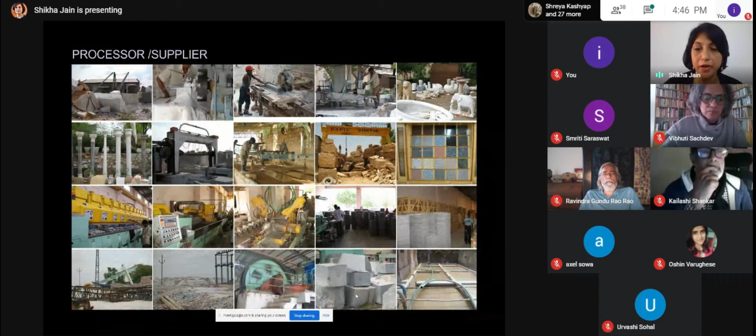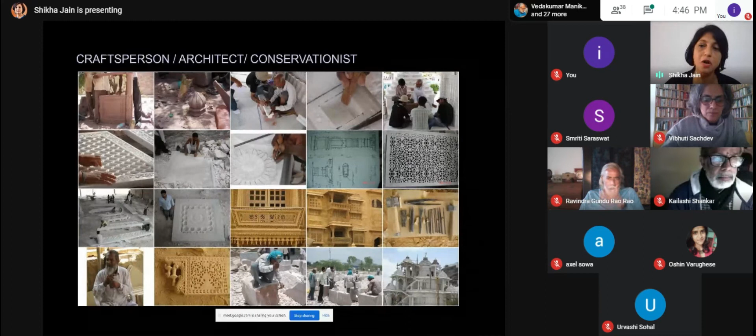I won't get into details of this, because my focus is really the craftsperson, who really gave us all the knowledge. We could record the various architectural elements, structural elements, and how they were produced since long, and how we can still continue some of these.

In the guide itself, we have looked at mapping each cluster, what kind of stone is there, the geological qualities of the stone itself, what kind of products are produced, what kind of finishes are used, and what kind of tools are used in each region.

So we had this kind of guide, also looking at the history of stone in each area. Though Rajasthan is supposedly one state, because of the diverse clusters and stone types, it's a different historical and even stylistic perspective that you see everywhere.

The types of stones, including the processing, the products, and the issues faced in each case, the techniques that are used. And this is a glimpse of the products from the Jaisalmer area.

So the question really was how can we learn about stone crafts and the knowledge systems. And of course, we have two references today. One is we understand the details from historic architecture, which is plenty in case of Rajasthan in stone, and also learn from the master craftsperson, fortunately, of which we still have a few in Rajasthan.

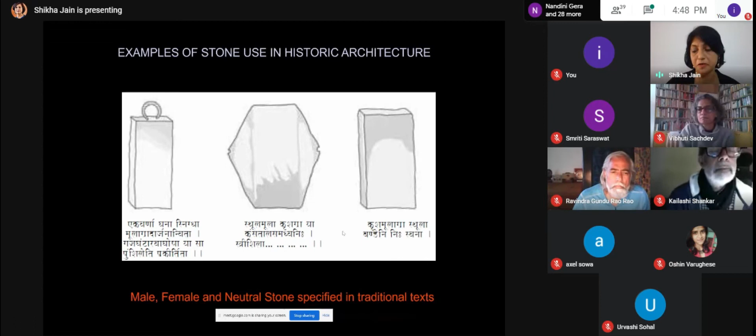So the guide also records what Vibhuti mentioned about the Shastric perspective, the three kinds of stones that are used, and historically what the structures were like, such as temples where these stones were used. There are texts like Rajwallabh Mandan in case of Rajasthan and Mewar region, used primarily in Rajasthan and Gujarat, a 15th century text where such aspects are mentioned.

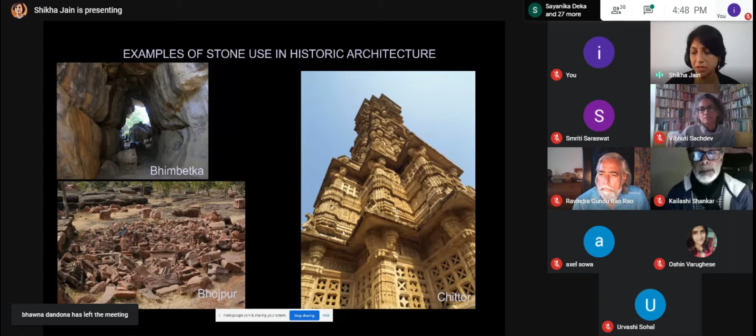There is even mention in the Agama Shastras of what kind of stone is used for which kind of deity, which Mr. Kailash has already elaborated on a lot.

But moving further into history, towards the Mughal period, we again find how stone buildings were constructed. Most of the Mughal architecture was largely built by Rajasthan craftspeople who were trained at that time. You can see this from Akbarnama and Baburnama, the construction of a garden or the construction of the Agra Fort, which is in red sandstone.

And later on, of course, we have evidence with the British, Lutyens' Delhi, entirely made from stone from Rajasthan, as well as craftspeople from there.

And of course, post-independence India, where we continue to use stone, like in the Birla temples that we see today, or even 20th century temples like this Vipassana Pagoda in Mumbai. There are more Birla temples across everywhere, so it's good to see continued use of stone.

I would agree with Vibhuti that it is also thriving. I feel stone is thriving, and which is really good. And the craftspeople need to thrive too. So moving on to really the builders in stone, which are our craftspeople.

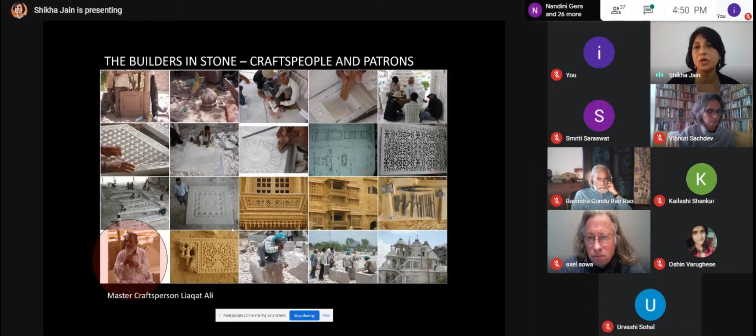This Mr. Liaqat Ali is one of the master craftspersons in Jaisalmer. I'm not sure whether he's there anymore, but when we were working on this, we had long interviews with him, and we could really understand the thought process and the kind of

the kind of intelligence that a craftsperson has, and the intensive knowledge that we need to now disseminate to the younger craftspeople who are just joining and copying most of the time. So who are the stone craftspeople today? Like what Ravi said, he was talking about the newly trained communities who sometimes don't know much. But then you also have the master craftsperson from several generations. Out of the 100 plus that we interviewed, we found that there are at least 6 or 7 who

can really be considered as master craftspeople, and who can actually train the younger ones in the right manner. If we look at the kind of segregation, the Stapati or Sutradhar - Mr. Kailash has already elaborated, he's really the master builder for temples, still has the knowledge. In case of South, it is the Stapati. In case of North, you have the Sompura community from Gujarat, who still continue till today. And they have the inner knowledge, but today they also have proficiency in AutoCAD and preparing estimates. So we had a lot of interviews and also had workshops organized with some of the Sompuras.

The sculptor or the Shilpkar, very knowledgeable. He's the one who himself goes to the quarry and picks the stone for a particular deity, because whether it's male, female, or a particular kind which is required for that particular god that he's going to carve, is the knowledge that the Shilpkar has. And that's how they select the particular murti, the stone that they want to make.

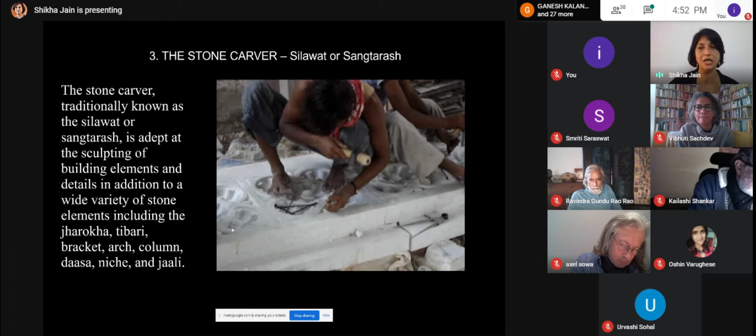The stone carver or the Silawat or Sangtarash, largely that came up during the Mughal period. These are the carvers who are doing intricate carving, whether it's jali or in the beam, the pattern that has to be given. That's what you see in this particular picture in marble carving.

The inlayer or the jadati, which is again the inlay work, stone inlay work that came from the Agra monuments created by the Mughals. But then some of these communities also moved on to places like Udaipur, where you still find Titri and Sukher as 2 stone clusters within the city of Udaipur, where you can see this stone inlay work that continues and is currently being used in a lot of heritage hotels and elsewhere.

And of course the basic stone mistri, who would be making your stone wall, who is still in plenty in case of Rajasthan. And then of course the polisher or the quarry workers who would just be doing the finishing at times or basic carrying of stone who are there. So this is the gamut of workers in stone which currently exist even today in the stone industry in Rajasthan.

And moving on to the manual that we mapped, we are looking at structural elements. So we documented each element in detail. I'm going to quickly go over these when I will just stop at the one on Jali, which we will show you in detail. And here we were looking at each element.

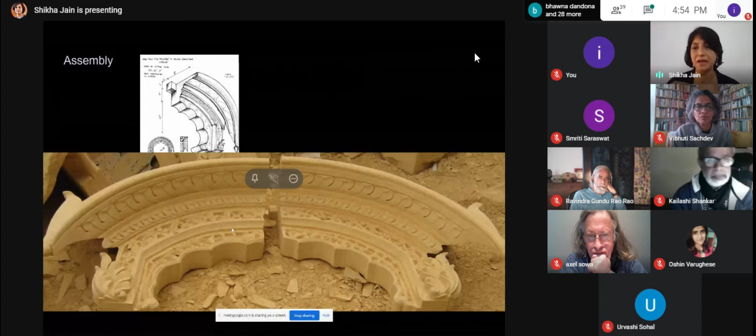Arch - what are the types as per construction method: cut stone, bracketed, corbelled, and then the types according to the form. Also the assembly, how it is assembled, the jointing in the form. And again, the jointing in the form also has that nar, mada - male, female, the dovetail joint, that is the tongue and groove joint that is there. So those are the codified languages of the craftspeople that we learned while documenting this.

And of course the finished products that are there in each case. Similar documentation for the beams. And this is much more elaborate in the manual. If you access that, you will find all. Some very important aspects like the bracket itself.

How do you make a single bracket, a double, 4 times, a corner bracket, and the most complex one, which is 5 or on all sides. So on the right side you can see the fixing of a bracket, which has 5 extensions to it and how it is fixed.

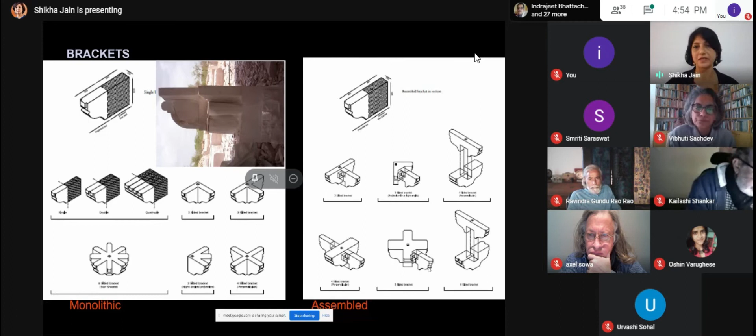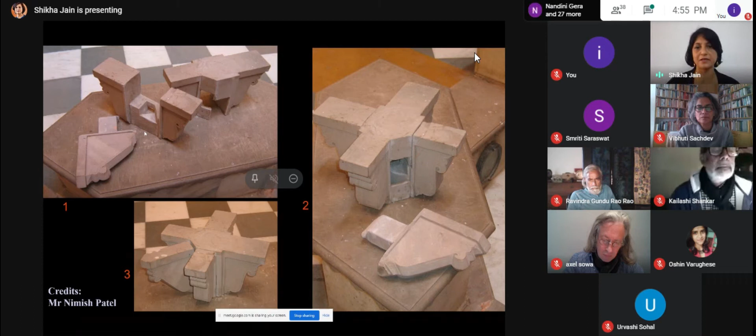And this is an example. This was actually created by Mr. Nimish Patel for the Haveli in Amer in Jaipur, where you can see a demonstration on how the bracket pieces are carved out. And these are 3 pieces that are then fitted in joints. And it just works very well as a 5-point bracket. And then according to construction, you have these corbelled brackets also. And we looked at the fixing details.

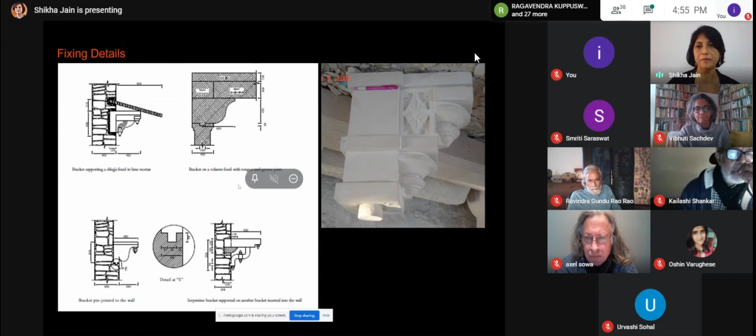How much does a bracket have to go inside to create the support that is required? In some cases, it's almost half the bracket. So you take the entire piece and you just carve on half of it, whereas the rest of the half goes inside the thick stone walls that you see in historic structures.

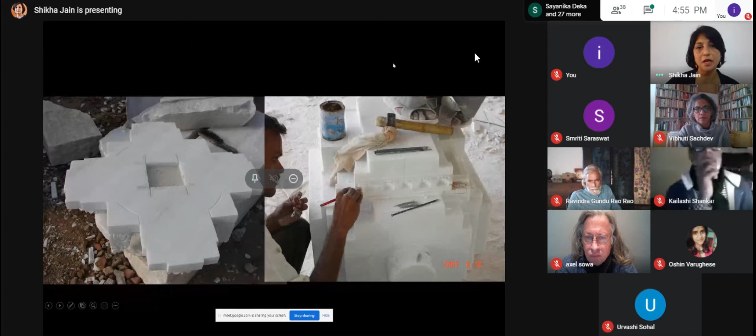These are examples of some columns. Again, the monolithic columns, how the assembled ones with jointing, or the simple masonry ones that you have. And the kind of jointing, again, that you see in these columns, or the variety that is there.

And a roof, which is very complex. Of course, you have the plain roof, which is flat roof, called the tukri roof in case of Rajasthan. And then you have the stepped roof, which is the sort of dome created by corbelling, and you find it in a lot of historic structures in Rajasthan.

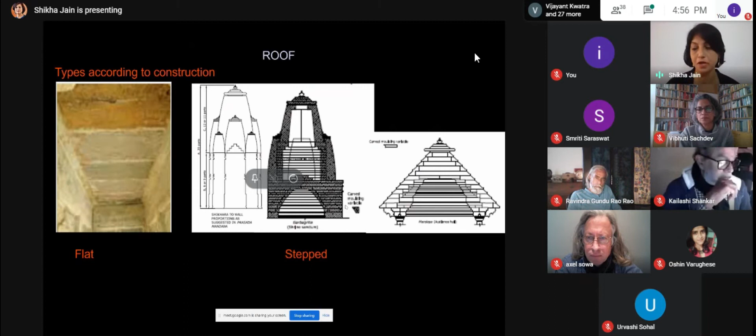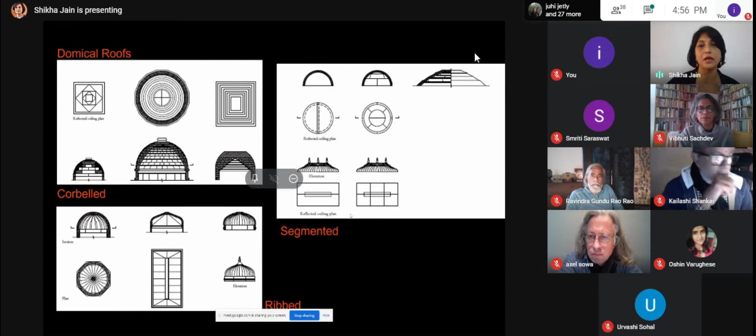I will show you one conservation that we have done in this. The domical roofs, corbelled roof, segmented roof, and these are, of course, the drawings that we created while looking at the sites and talking to the craftspeople. But this image would give you a clear idea.

So you can see this is the corbelled roof, so it's a chhatri domical roof, but corbelled here. This is a ribbed one where you see ribs joining each other to form the dome. And this is a segmented one where you see two segments coming up to make one chhatri. So there are so many variations.

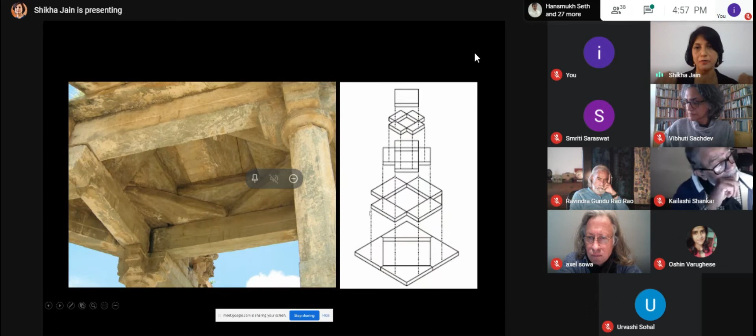And this is another chhatri where you see some kind of corbelling, but there is a system that is going in the laying of stones as they go up. And another example, which is a contemporary one, but from one of the workshops of the craftspeople that we visited.

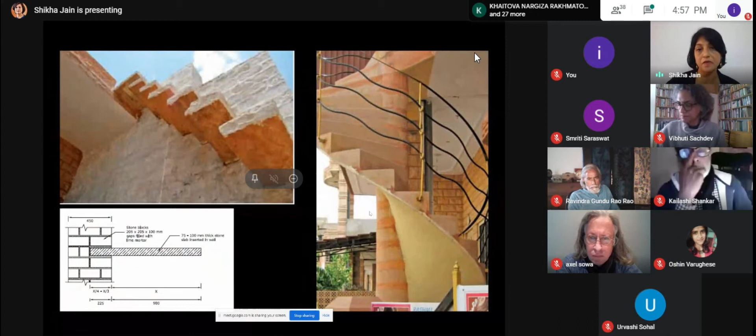Similar variations in stone staircases, which are projected, and very interesting ones that you see, which could just be treads fixed like this. Or in the historic structures, of course, we find a great variation.

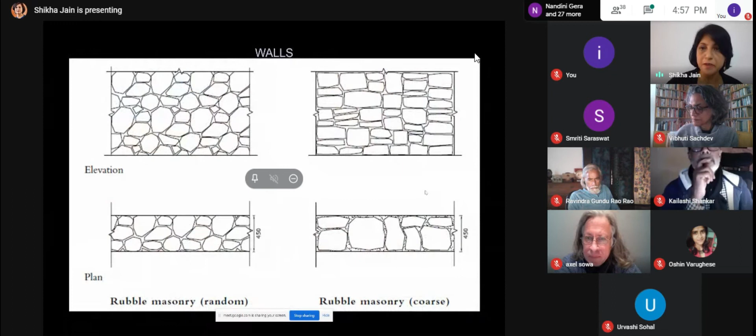The kind of walls we mapped, I will not get into details of this, but the rubble masonry, ashlar, and also locally what they were called, like the Talpai wall in Jodhpur, which is very typical on how they use the stone.

And these are some examples. So here you can see one of the walls, which is sort of a talpai finish that comes at like a cladding here.

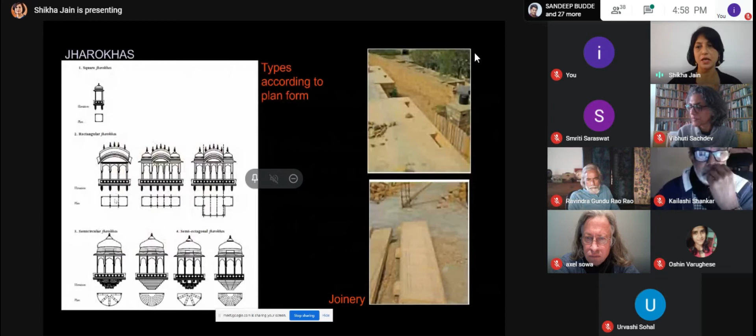And then going on to architectural elements, we looked at the various kind of jharokhas, again, how this fixing of this particular detail is done, the variations that exist in jali. I will get into the details later, but it just shows the variations that are possible, even in smaller details.

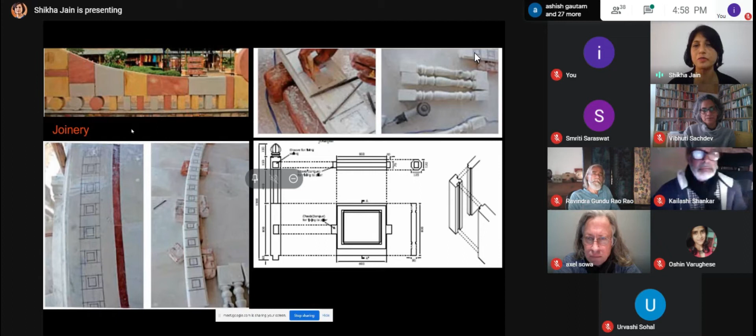Like plinth or coping, the kind of designs or carvings that you see, the railing patterns that are there, whether it's monolithic, assembled, or carved, latticed, various kinds that you see, both contemporary and traditional, because our whole scope was moving from the historic to the current practices.

And these are some of the contemporary examples of railing, including jali work also. And what you see right below on the right side is from the Gandhi Museum in 30 January Marg in New Delhi, where you just see these sandstone structures very interestingly tied up with the stone elements that are vertical, and then just the horizontal rods there.

The water spouts, so much variation in each detail. It's really saluting the craftspersonship that Rajasthan and India has.

And then, of course, coming to the current practices, the use of stone, which is largely in finishes. And the main concern here was that Rajasthan has a lot of stones, but now most of it is not being used for the crafts that should be encouraged, and which is a very high-end product that is created, but it is being sort of overused or misused in finishes like floor or wall cladding, whereas it has potential for much more. So maybe use less of the stone, because there are environmental concerns with the quarries and stone making.

I won't get into that. Even the craftspeople, how they suffer with diseases because of the way they work. But the whole point was to reduce the bulk use of stone, or only use it from the quarries where it is not appropriate for carving. And that kind of judicious selection is what is needed for our quarries, which are finishing now.

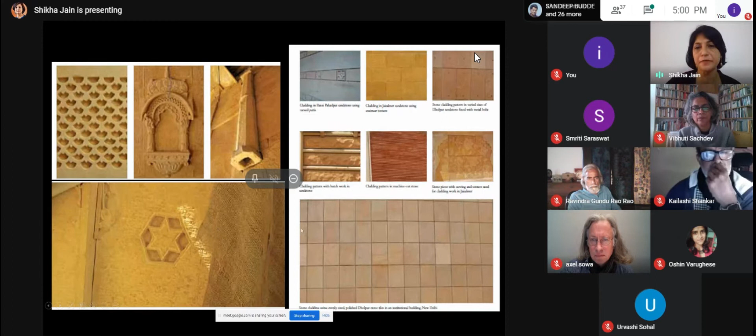So this is again showing various kind of finishes, surface finishes, which could also be hand and it could also be machine now. Again, the finishes on the cladding itself, you find a wide variation there in sandstones of various colors.

I will just explain the Jali in a bit of detail and then move on to the practical applications of how we are using this knowledge today. So for each element we've looked at, what is the origin and historic evolution? What is the process and product?

This goes for all the elements I just showed, from arch to all the other details, and I'm just showing it for the stone Jali itself. We find the earliest historical evidence as a square Jali, a basic square grid pattern in Rajasthan, which you will find in the Chittor and Kumbhalgarh monuments shown here, sometimes a basic square of 9 by 9.

9 by 9 was supposedly also a very auspicious square number that was used. And of course, with historical development and Mughal influence, it evolved, and then later again with the British time it changed. The referred texts on Jali I've listed are the Rajvallabh, the Jal Kaumudi by Pandit Kundan Lal in Hindi. I think Vibhuti would be aware of that, and she's written a paper on Jali which we were also referencing during the making of this manual and publications.

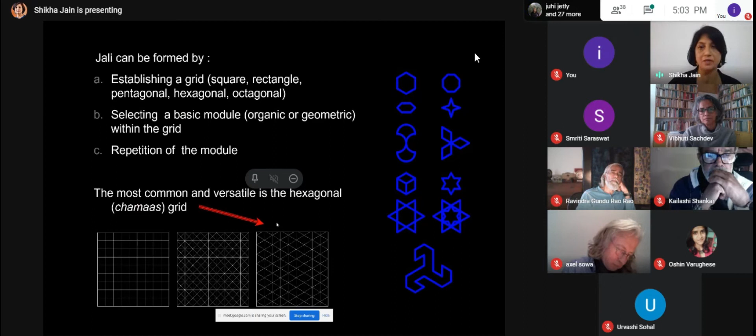The basic principle is that you take the area where you want to make a jali. If it's a rectangular piece, mark the center, and then divide both sides according to the intricacy required, so you make that grid. You draw the arc using the grid depending on what kind of pattern is required, and then you complete this.

Once you have this pattern, a master craftsperson looking at this square jali could evolve 10, 15, 20 patterns, or maybe more. But if it's not a master craftsperson, just a regularly trained person, he would not know anything beyond 1 or 2 patterns, and he may just trace that pattern rather than generating it. So this is what we learned, how these master craftspeople were actually evolving patterns just by using a grid, and those patterns were just in their mind, with a methodology to do it.

This is just the simple jali, but of course you see variations from different sources, Dholpur, Pindwara, Jaisalmer, and in white Makrana marble. So the same pattern you can see on different scale, and variations even in shape, as you see on the right side.

This is the master craftsperson Abdul Manan in Makrana, showing us how to make this particular jali. I don't have this on video mode, but there are YouTube links to DRONAH, our organization who worked on this, where you could look at the whole video clipping about how the jali is first marked using a green leaf on the white marble, then marking the borders, then using the compass to make the pattern, the divider to make the grid, and then marking the curves, and finally carving out this particular jali.

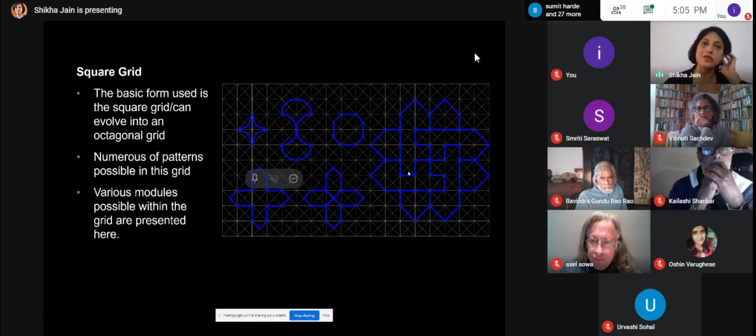Your final chiseling has to be done by hand, and that is what is important for hand carving in stone. This is just showing what kind of square grids, how many variations can evolve.

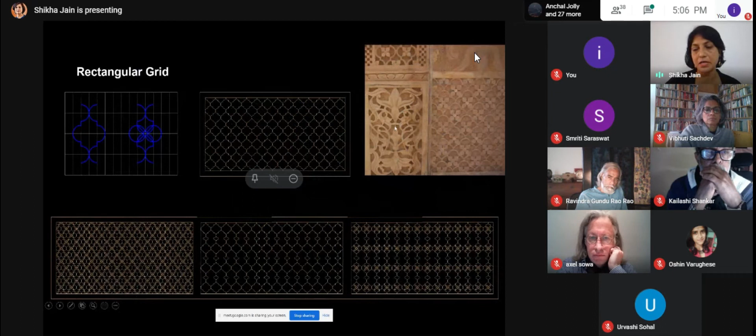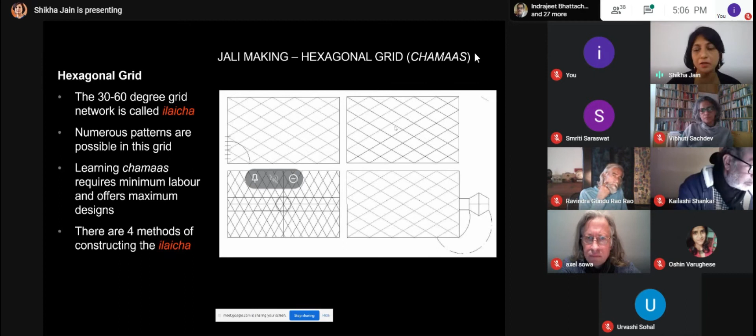The rectangular grid, you can see what it can give you on the right side. The hexagonal grid, which I mentioned, the Chamaas or the Ilaicha, is the network that they make to create it. Learning Chamaas requires minimum labor and offers maximum number of designs. So this was used the most, generated during the Mughal period, and you find most of the patterns being in this kind of grid.

But like I said, if it is a younger person, rather than making the Ilaicha in the proper methodology, there are four methods actually for making it. They may just make the grid and put a template on it, which would actually be just like copying and pasting. And if you need it at a different scale, you would make another template, and that's really not the right way. One really needs to work and mark on it, like the master craftsperson who taught us how to do it.

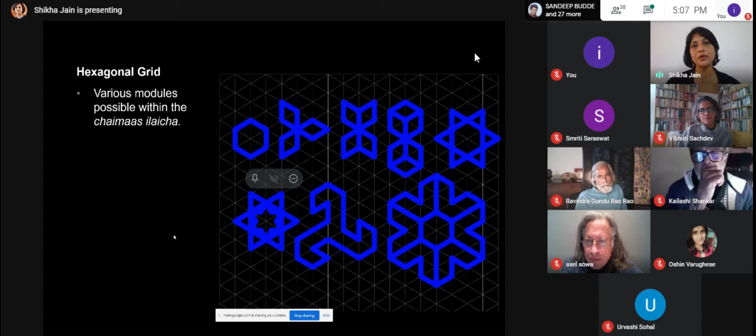This is a problem I faced when I talked to Liaquat Ali in Jaisalmer. He was just shocked. He said, I've got these young architects, or recently passed out architects, who come and give him an AutoCAD drawing with a pattern of jali and say, make it. He said, you look at the drawing and they have no knowledge of whether this can be made in stone or not. They are just offsetting on AutoCAD, creating a pattern that looks good on your screen, and you think it can be converted into a jali. So that is the gap we need to fill today, and really learn from such master craftspeople.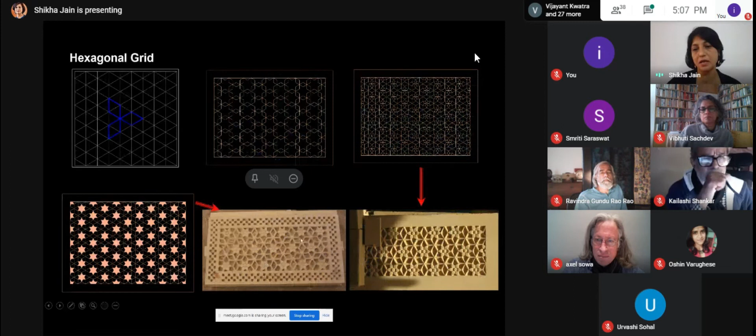So the hexagonal grid, again, look at the variety of patterns. It can be just jali, or it can be filled like a relief work. There are maximum variations possible in this one, and different modules that you can pick. It's just so much fun looking at the designs that it can generate.

The square grid we already talked about, and you can see how the square grid can combine with the octagon. When the square and octagon combine, you can see variations like this where both are there. This is another example, Jali door in the case of Jodhpur, a house in Jodhpur. That is one area you still see houses being constructed and stone really thriving there, with a Jali combining both the square and the octagonal grid.

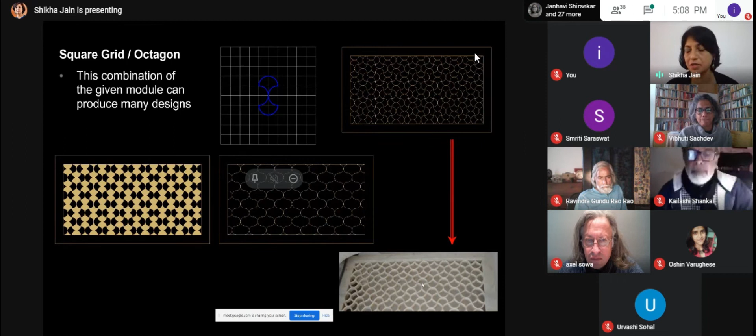This is again the square and octagon, and you can see how sophisticated this Jali is, with a pattern that is almost like a wave. You would not even know there is a square or octagon there because it almost seems like a curve. This, of course, is a really supreme example. You can see the thinness of the Jali, and this is again like a mix of the two grids, but there is no way you can even decipher the complexity. In this complexity, it's difficult to decipher the grid that is originally there. But this is the beauty of stone craftspersonship in Rajasthan, I would say.

You can use the hand tool, but it is today the technology of the day, and it does allow—because you don't want the craftsperson to suffer and keep cutting the stone, which could be easily cut like a big piece with a machine. But then you do want that craftsmanship to be retained. So one needs to know where a tool can be used and where you can only work with hand.

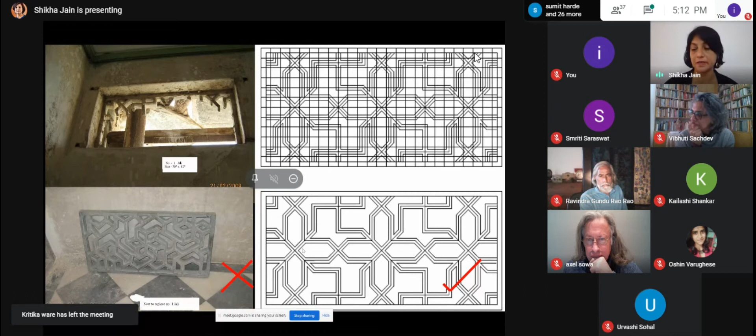So here is where I would say, obviously retaining this original piece, which is almost gone, does not make sense. I can take it out and put it as a museum piece somewhere, or keep it in one of the stores as a record of the old one. But I do need to encourage the craftsperson who can create this Jali like this, and who is still living in Rajasthan today, and needs to be encouraged.

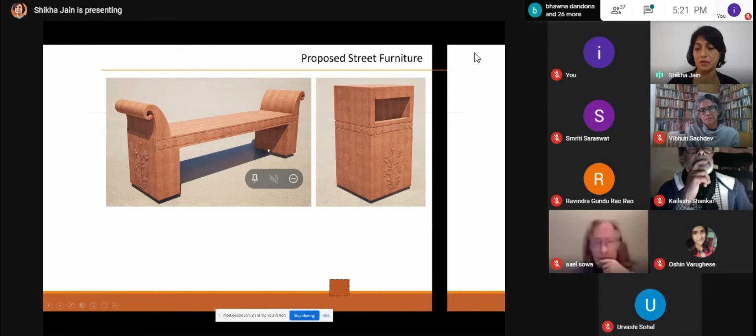In Red Fort, there was a proposal we did for Dalmia for the vision document, in dialogue with ASI, where we looked at possible ways stone could sync in with the existing language of the fort. This is the kind of stone furniture we proposed, the dustbin and the benches, which are now installed in Red Fort, and they merge with the character.

But again, this is where we are trying to promote more of stone craftspersonship.